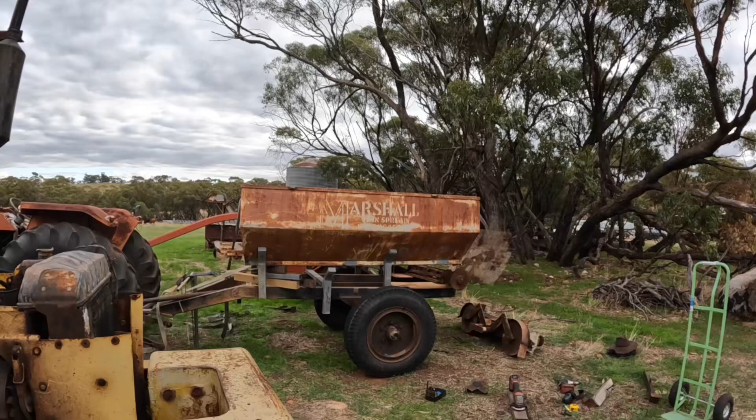Hi everyone, welcome back. Well, we're back on our Marshall soon to be multi-spreader project.

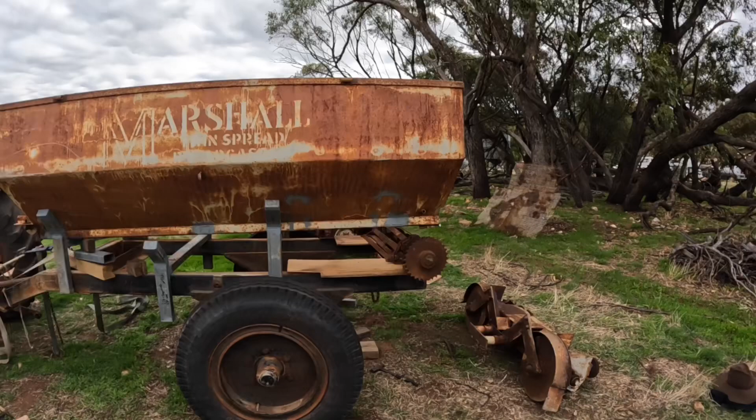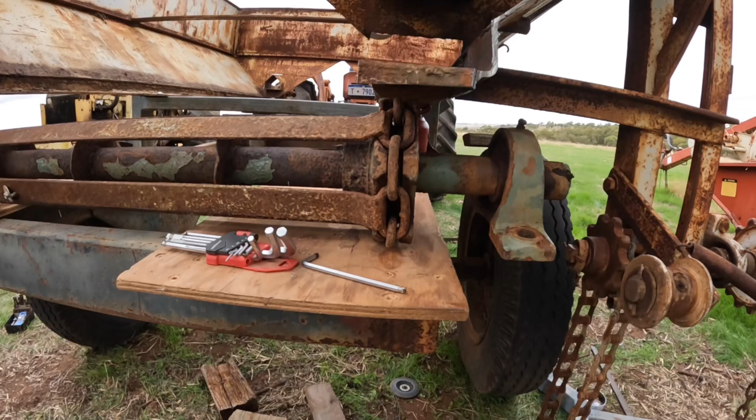We've spent a bit of time this morning scratching our heads and working out what we're going to do. We've taken the spinners off because they're not going to sit in the right spot anymore. We've sat the new shaft in underneath here to try and work out what heights everything needs to be. So we've got it pretty much where we want it to sit.

We're going to make up a couple of angle brackets that we're going to weld onto this face of the chassis here, that just sit up another 50 millimeters to support the bearings. We're going to shift the bearings in on either side of the shaft so that they're a bit closer to the chassis here, and then that is sitting in the right spot.

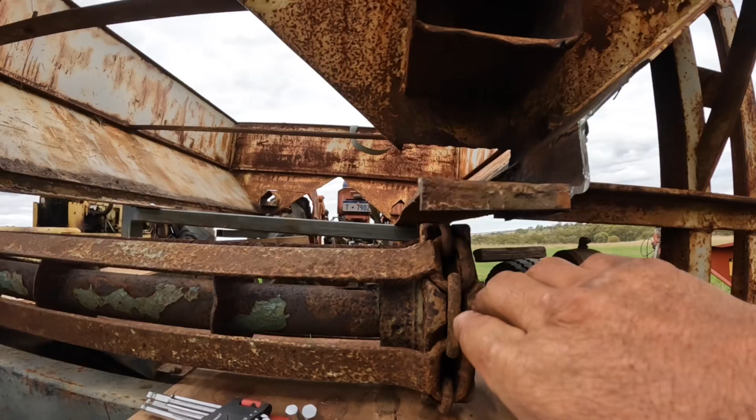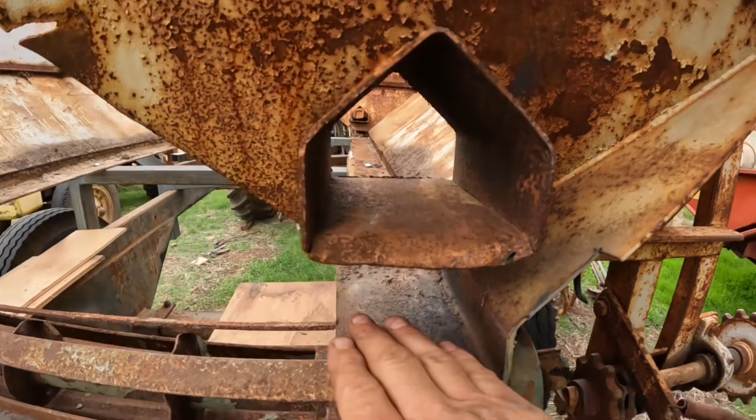Once we've got the shaft fixed in place and we're happy with the way it's sitting and that it turns and everything, then we can drop the bin down to exactly the right spot and we can bolt that into position. At the moment it's sitting a little bit high, so it's got to come down probably another 40 mils or so, so that the piece of plywood that we are going to sit in here to make the floor of the bin is at the right height for these slats to just run across the top of it.

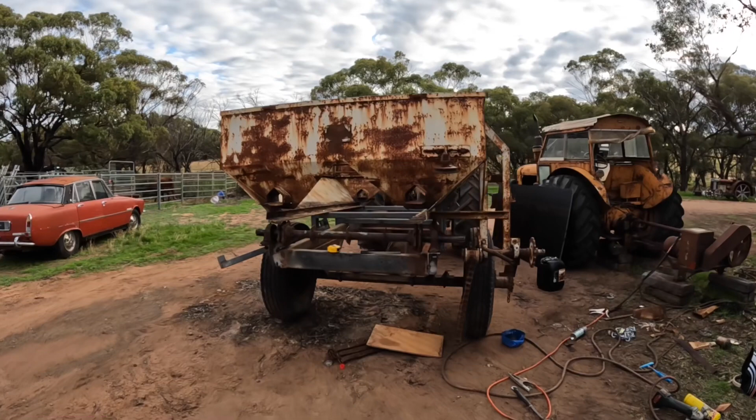So I'm going to move this down to the welder and weld in these two brackets that we've made up now, and then we can have a look at lowering the bin down. So it feels like very slow progress on this at the moment, but we've got our brackets welded in and we've got our shaft just sitting in place with a couple of bolts loosely in to hold it.

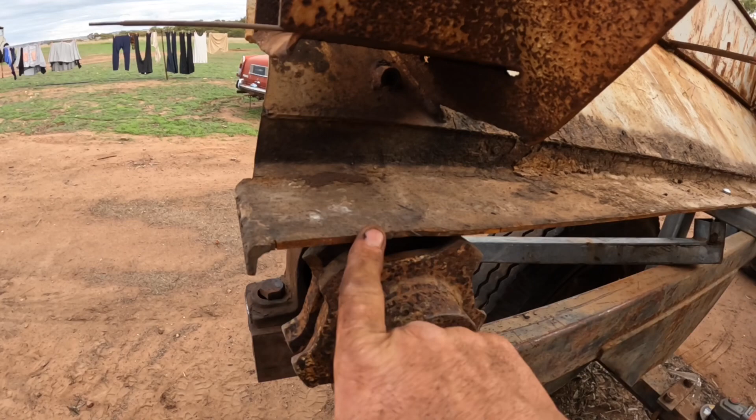Now that we've done that, we can see where we need to cut out here to go around the shaft, and then we'll be able to fit the plywood base into here. And from there we'll be able to actually see what height we need the rest of the bin. So I'm going to start marking and cutting this out now, and we'll see where we get to.

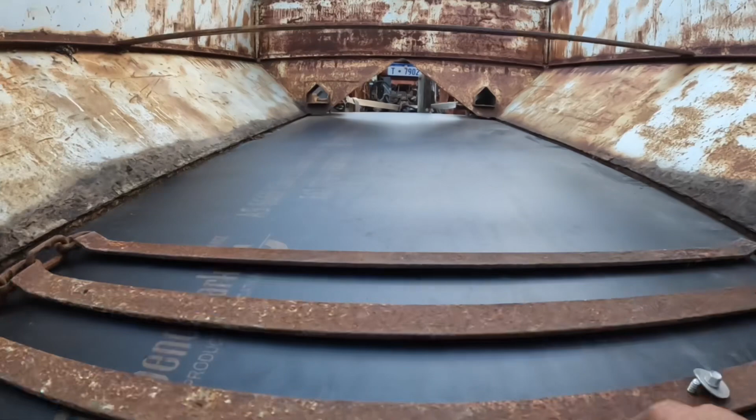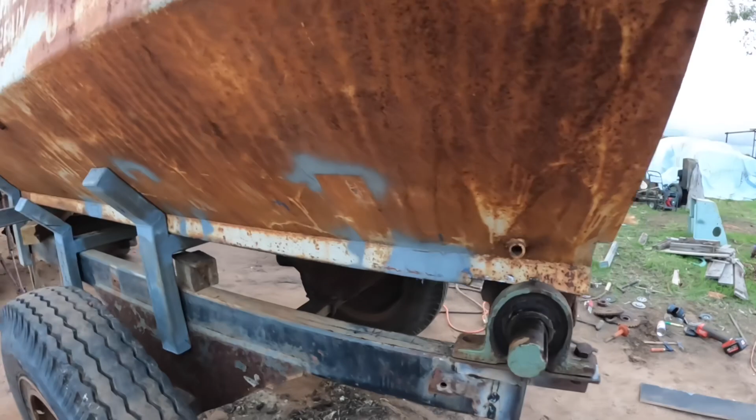Okay, so we've got our shaft mounted up. I've cut the plywood to go in the floor here, and I've got this little short piece of chain just to make sure it's all going to run properly, and we've chocked this up to the right height. It's even all around now, and I'm pretty happy with the way that's going to run. I think that'll work fine at that height.

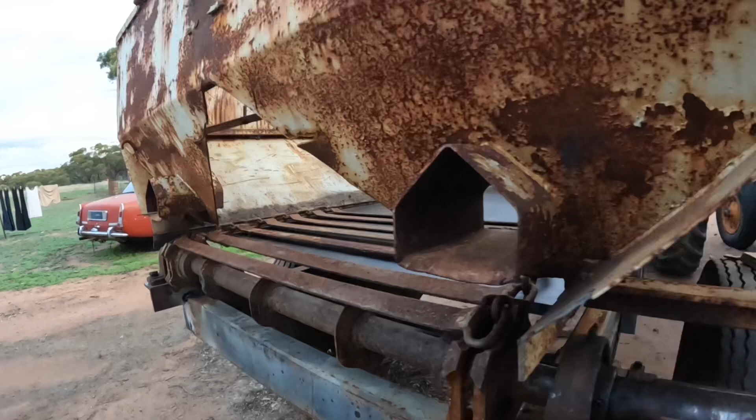So we can now go through and fix all of these mounts into the right position. The next thing we need to do is to make the idler shaft that goes at the front end of the spreader to run the chain on. So we're going to get on with that next.

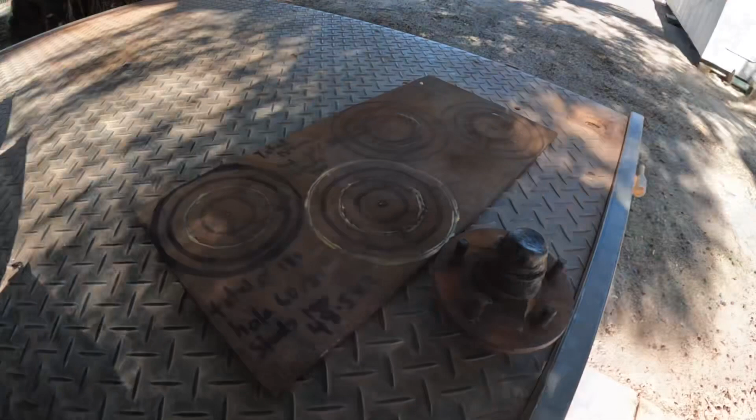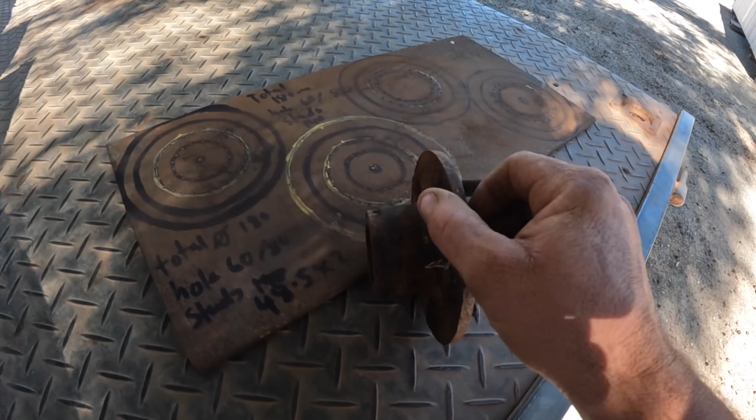To make up these idler hubs for this chain to run in, we're going to use an old trailer wheel hub. We've got to shorten the trailer axle so that the centre of the hub centres on the chain on the spreader. And then we're using this piece of 10mm plate. We're going to cut out four circles, 180 millimeters in diameter.

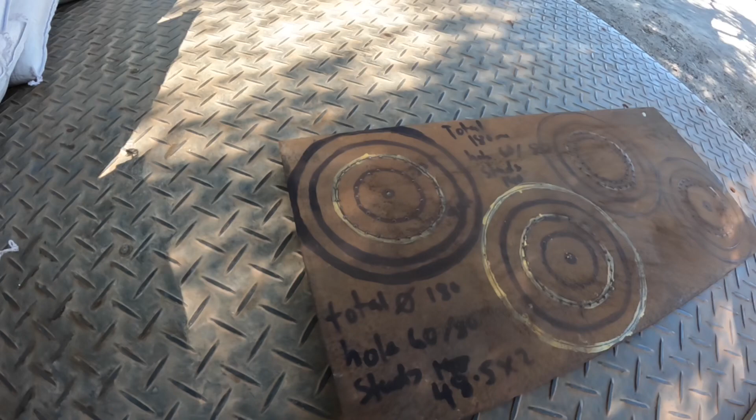We're going to cut a hole in the middle of them all, and we're going to bolt one of them on either side of each of these two hubs to give us a larger diameter with a gap in the middle, and the chain will run in there. That's pretty much what the original looks like on the other spreader that I had a look at, and I think this will work quite well. This is almost the same width as the chain links are. I'll probably just need to space it out another mil or so with a couple of washers in here.

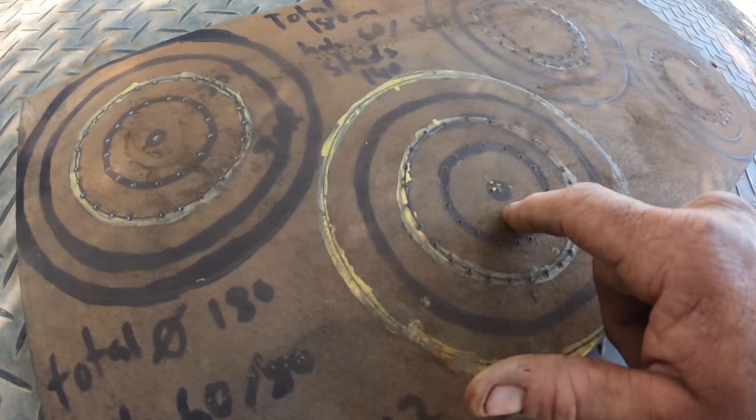I've marked the outside yellow line as the outside diameter. This black line here was a mistake. The inside circle is the circle we're going to cut to go around here, so it sits hard down on this face. The other ones on the back here have a larger diameter, so two of them have to have a larger circle in the middle, and this line here is the center for the studs.

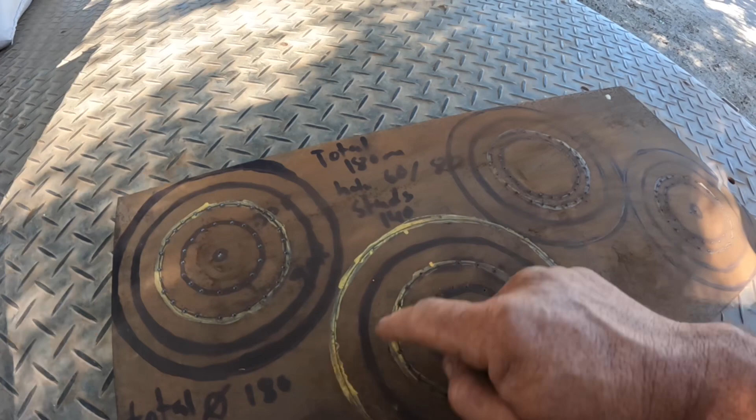So once I've cut these out, I'll clamp them all onto the hub and be able to drill on this line. I'm going to oxy cut out the center here. Whenever you're oxy cutting, the first thing that happens is you burn off your scribe line or any markings you've got. So I've just been around with a center punch and center punched on the mark I need to cut on. Probably the heat will burn off this line round here too, so I've center punched this one. I will center punch the outside one here.

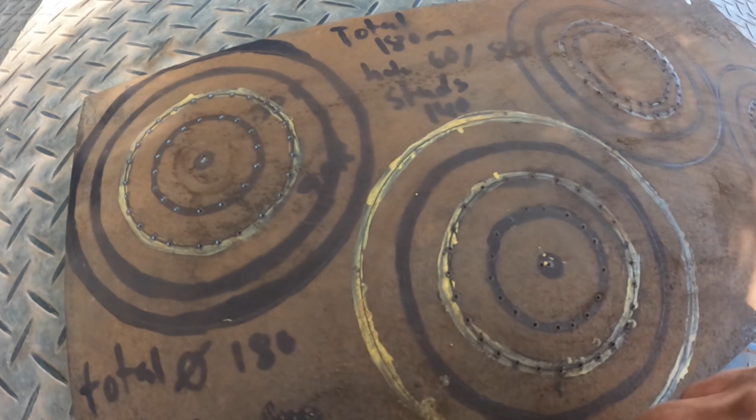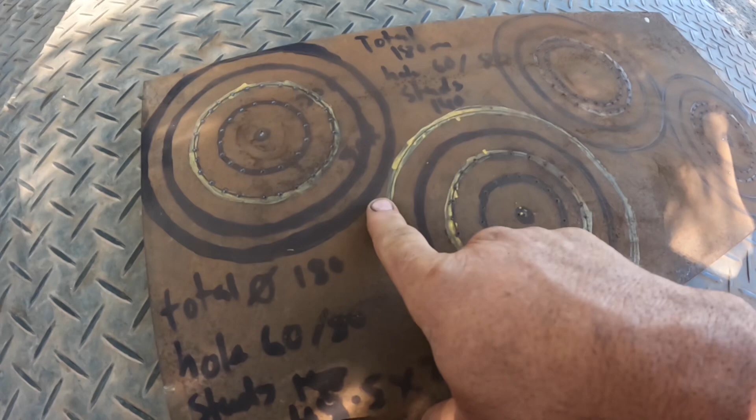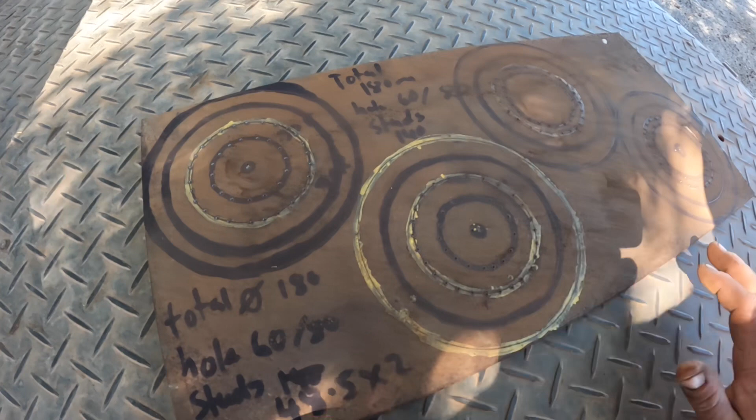The outside of these is going to be cut out with the angle grinder. There's an awful lot of cutting to do here, probably a couple of hours of cutting, and I'm just going to have to get it as round as possible. Jobs like this are so much easier when you've got good access to a lathe, but my lathe is not currently set up, so we're going to just do this project with what we have available to us and do the best we can with it.

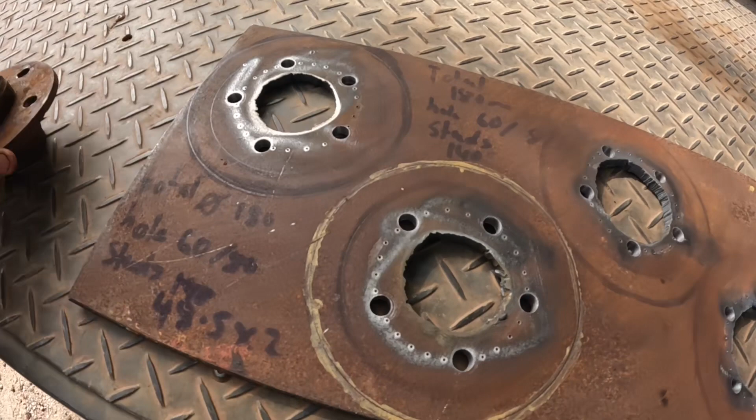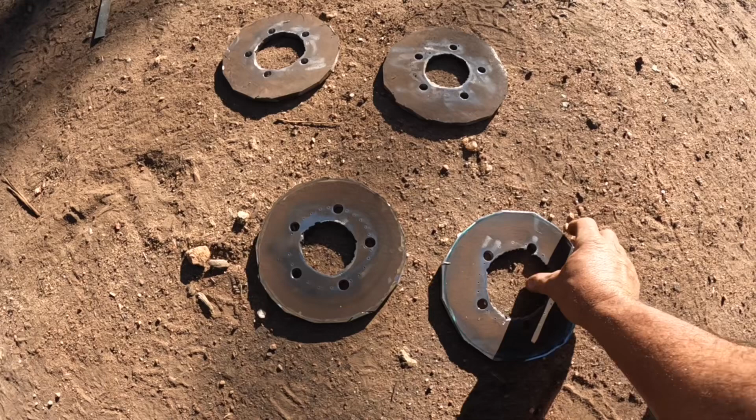Okay, so we've cut out our plate for our hub to fit in. We've drilled the holes for the studs to go through. The next job is to cut out each individual plate, and there's going to be a few hours work in that, so I'm going to get on with that now. Okay, so we've cut out our 4 circles, and they're not too bad, but now we just need to go over them with a grinder and make them actually round. That's probably another hour's worth of work, so I'm going to get on and do that now.

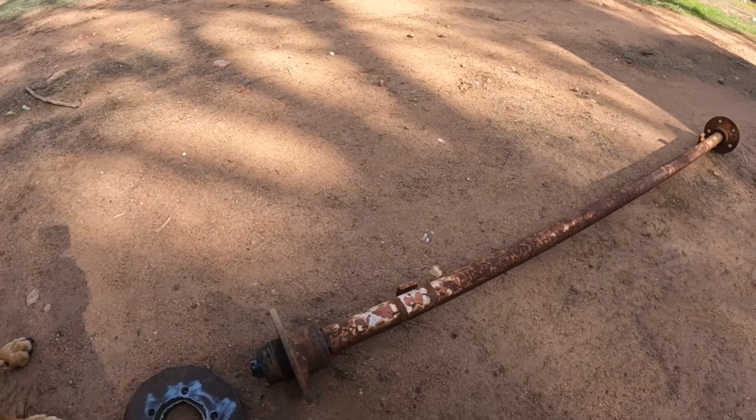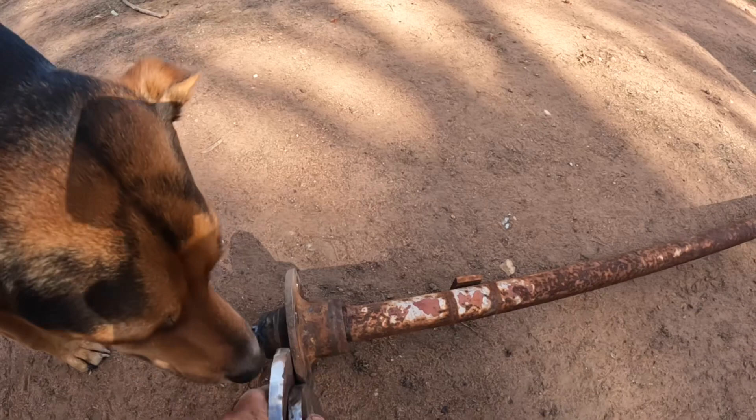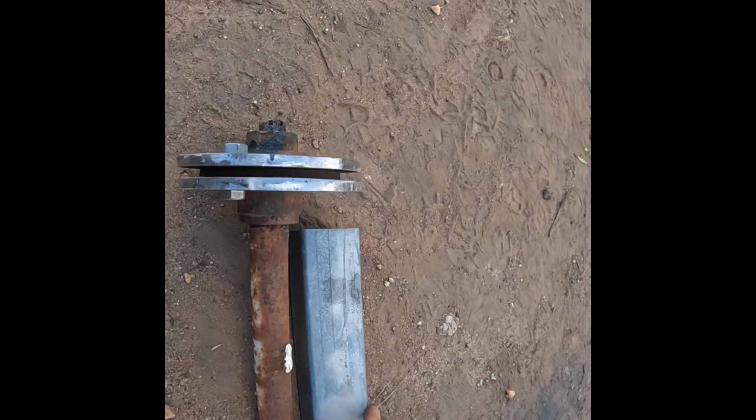This is the trailer axle that we're going to use to make the idler shaft. So we've cut out our 2 circles here. They sit on either side of the hub like this. The trailer axle at the moment is a little bit too long, so we need to shorten it down a little bit. So we've bolted our 2 discs onto the axle hub loosely and put it back onto the axle. We've trimmed the axle down a bit, and we're now going to weld it onto this piece of steel to make it the right length.

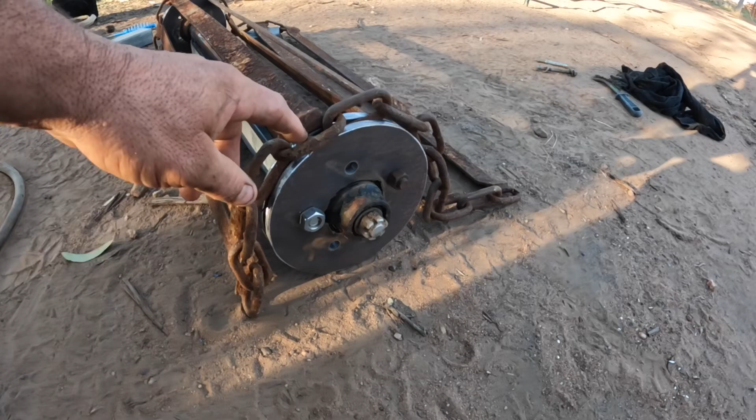Here is the complete idler shaft with the chain sitting on it to check for fit. It's turned out pretty well. The gap here is just a little bit narrow, so we're going to have to space it out with a couple of washers.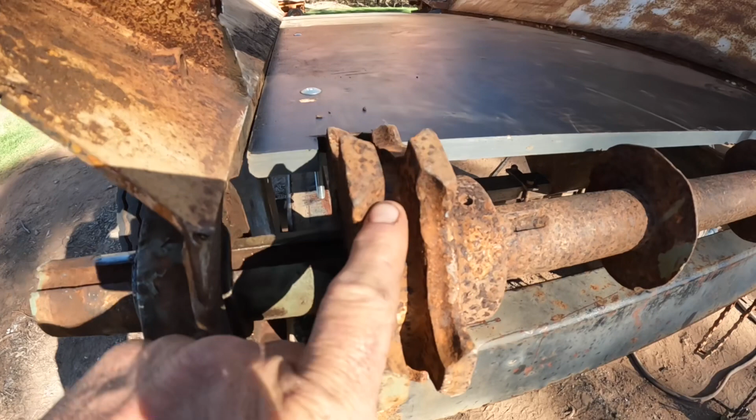The next thing we need to do: this shaft here on the back has a lot of wear on it. You can see in here, this bit should be the same level as this. The shaft was actually removed because of this wear on the old machine. I think this is cast steel, not cast iron, so we should be able to weld it. We're just going to build this up with a bit of weld and then grind it off again.

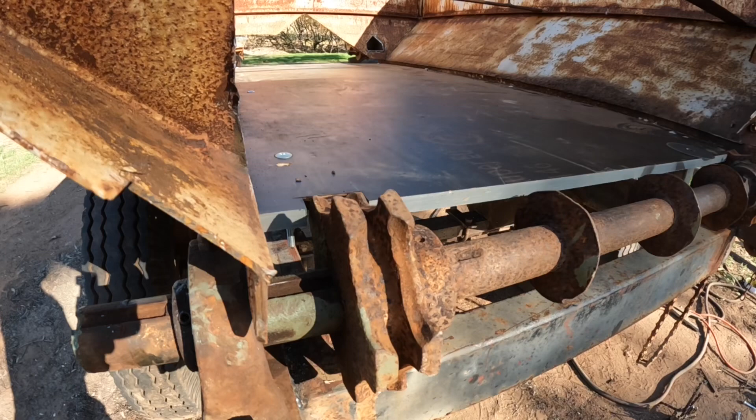This wear was causing quite a lot of issues with the chain because of the length of the link on the chain moving too far. It was starting to climb up on these and damage them even further and also stretch the chain. So we're just going to weld these up now and see if we can improve that a bit.

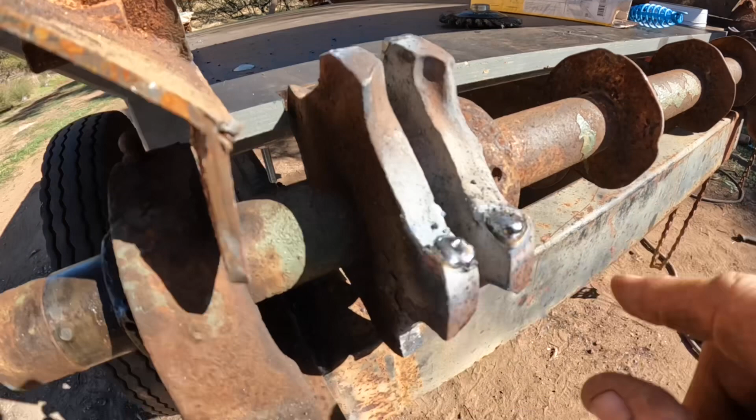Okay, so we've spent a bit of time now with the welder and grinder, and we've gone from worn like this to welded like this, and then spent a bit of time with the grinder, got it pretty much looking the way it used to when it was new. There's a few little imperfections in it. This is a very slow revving shaft, and those little bits aren't going to make any difference. So next I'm going to take the shaft off and turn it round so that I can get this side a little bit more easily to weld up. But I'm pretty pleased with the way that's coming up.

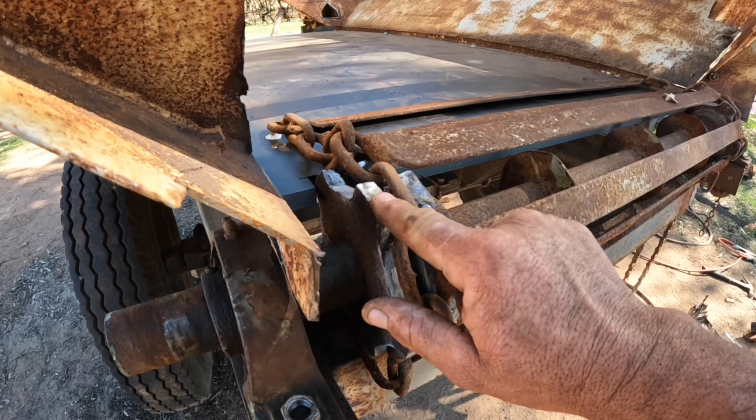Okay, so we've finished welding up this drive gear here and grinding it back. I'm reasonably happy with the way it turned out, and the test piece of chain we've got here now fits so much better than it used to. These links would move around so much and start climbing over this, so it was well worth taking the time to weld these up and repair this drive gear. So now that we've got this sitting in, we're almost ready to try and pull the full length piece of chain through and start building the rollers up the front end to hold the front end of this piece of chain.

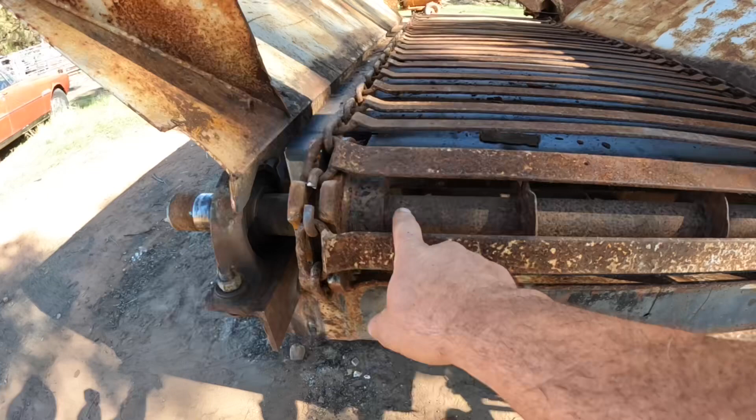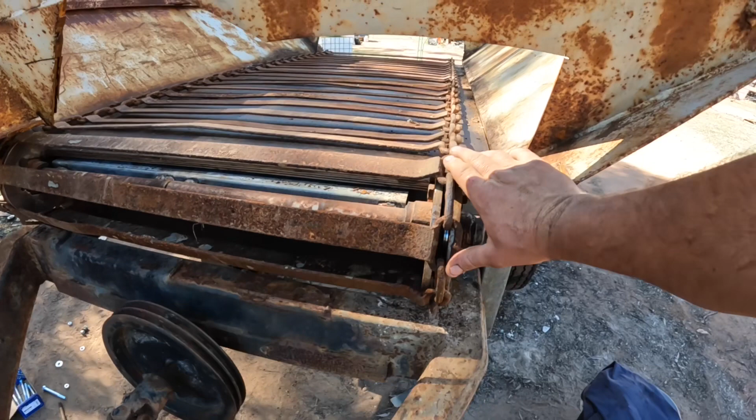Okay, so we've got the apron chain in now with the rollers. I haven't put this in permanently. I've got a link here that I've got to weld up, but I just want to get everything else set up before I get this permanently in place. I'm pretty pleased with the way it turned out. We've got our front shaft in here. This side here needs a little bit of adjustment. It's just not quite sitting in there properly at the moment. I think there's something that's not quite square here, but we'll fiddle with that as we get a little bit closer to getting it all working.

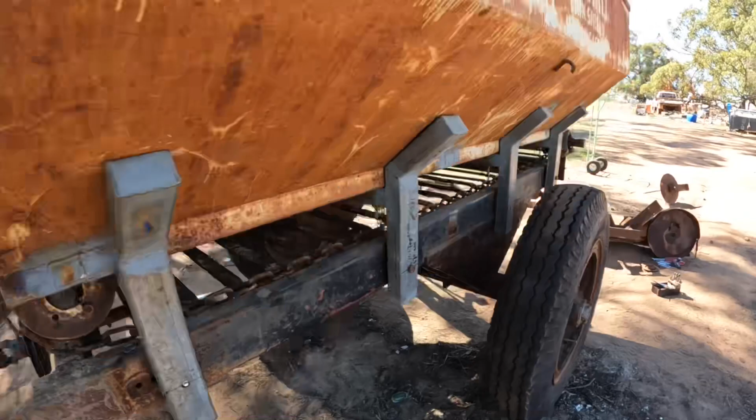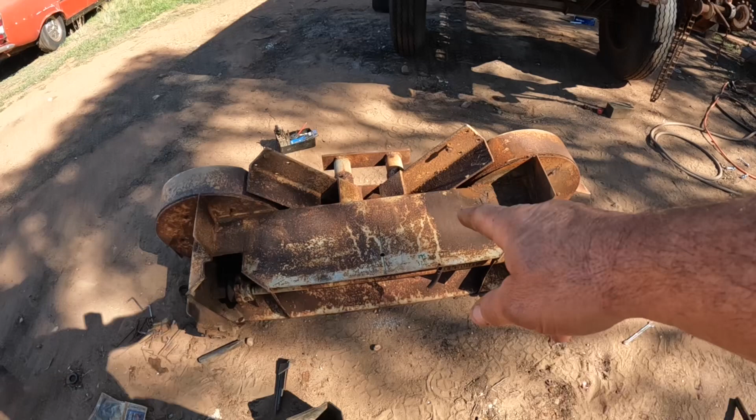So the next step with this is to set up the carrier for the spinners. This side is the top, and this side is the side that goes onto the back of the spreader. So I'm going to work on getting that up into place and working out exactly where it all needs to sit next.

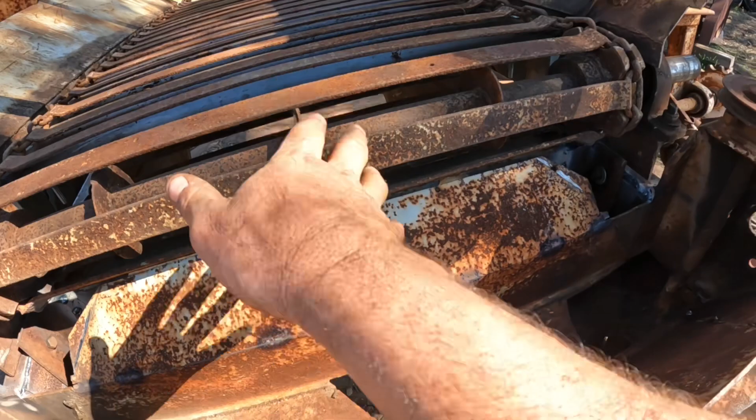All right, so we've got the spinners mounted back up again. We've got a bit of work to do in here still. I've got to put something over here and some chutes that divert it down onto the spinners here. And I've still got to put the shaft on the side for the belts to run on to drive the two spinners. I'm not overly happy with the way these two spinners have fitted, but they're going to work like this, I think. So we'll give this a go for this year, and probably next year we'll take it apart again and just modify the back end a little bit.

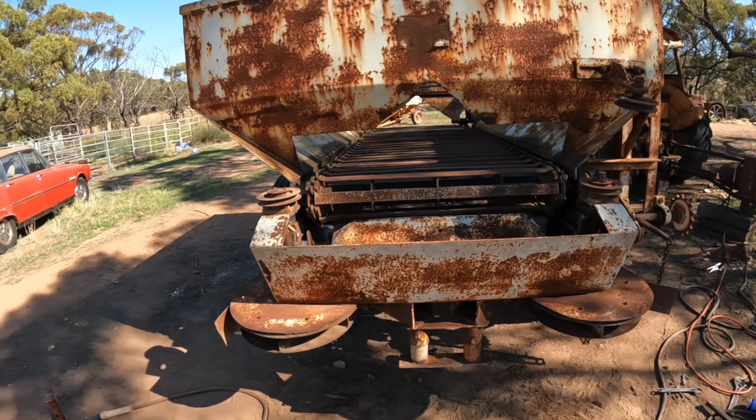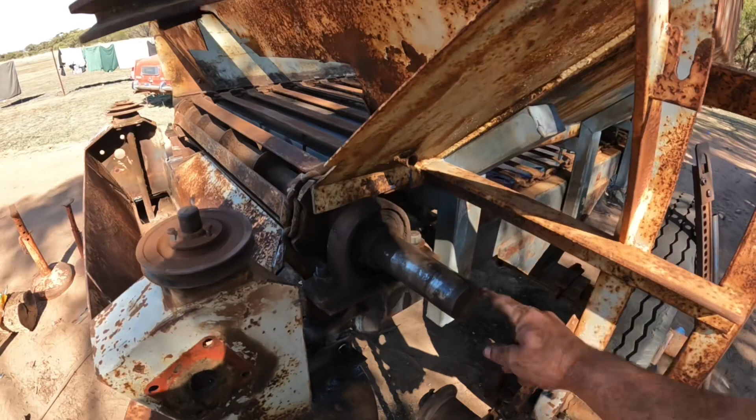So we've still got a little bit of work to do to this. I've still got to work out how to drive this. The old chain shaft turned that way. This one has to turn this way because we're using the top of the chain instead of the bottom of the chain. So I've got to make up some sort of gearbox, and I'm not quite sure how I'm going to do that yet. I've got a couple of gears out of a windmill that I'm looking at mounting here to make it go in the opposite direction.

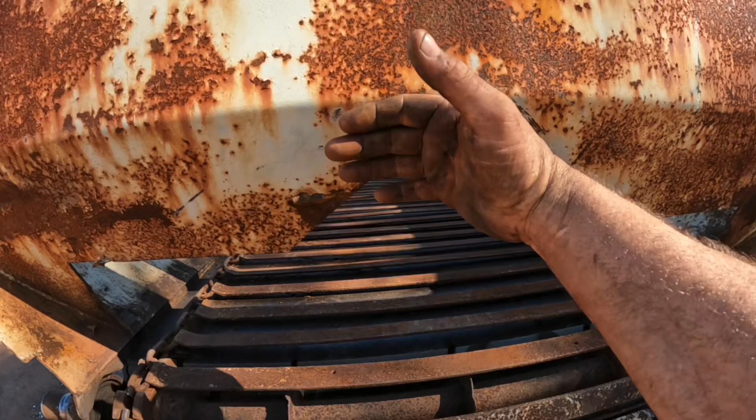We've got to put the shaft on this side still, and we've got to fill in the other end so that the fertiliser doesn't fall out there, and we've got to make up a bit of a door for this end that we can adjust to change our rates, but we're getting pretty close with this.